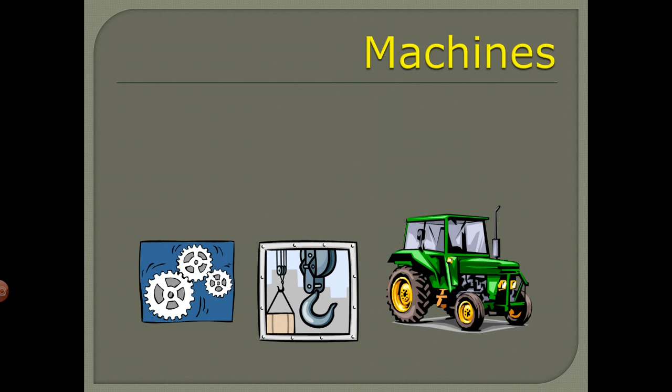This week we're talking about simple machines. What exactly makes a machine a simple machine? Well, a machine is any device that makes work easier.

We learned in the last chapter that work means using a force to move something a distance. A machine can change the size, the direction, or the distance over which a force acts. So that means a machine can allow you to use less force, move an object a greater distance, or change the direction of the force you're using, which in essence makes work much easier.

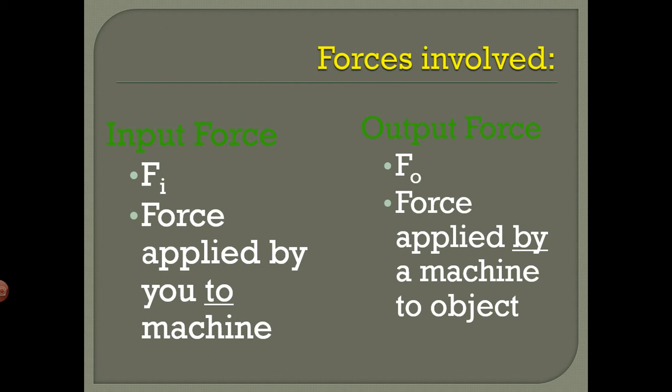There are two forces involved. The first force is called the input force. When we write this in an equation, we call it F for force, I for input, so Fi. This is the force applied by you to the machine. There's always two parts: you apply a force, and then the machine applies another force. The other type of force is called the output force, also known as Fo. This is the force applied by the machine to whatever object you're trying to move.

Since there are two forces, there are also two types of work being done. The first is input work. This is the work done to a machine, the work you would be doing if you were using a machine. It's equal to the input force times the distance through which that force acts. In other words, it's equal to how much force you apply times the distance you move in order to move the machine.

The other type of work is output work. Output work is the work done by a machine. That's equal to the output force times the distance through which the resistance moves, or the force that the machine applies times the distance the machine moves the object.

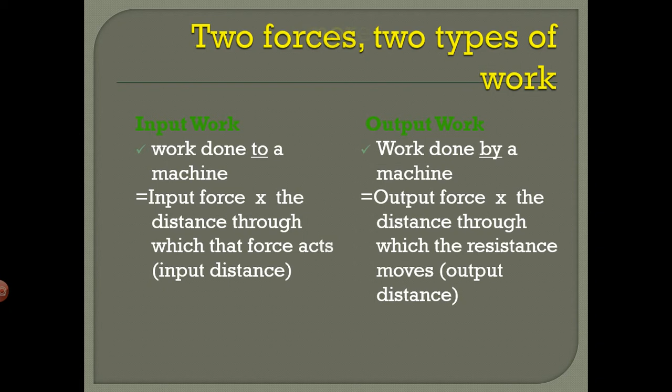What do you think? Can you get more work out than you put in? If you are using a machine and you put in a certain amount of force to move the machine a certain distance, and the machine transfers that work into the force it applies to the object and the distance it moves the object, can you ever do less work than the machine?

The answer is output work, or the work the machine does, can never be greater than input work. So even though machines make work easier, they're still not multiplying the amount of work you can do. You still have to do more work than the machine.

Why is this? Because some work is always needed to overcome the friction between the machine and the object it's moving, or the friction in the machine itself, or the friction between you and the machine.

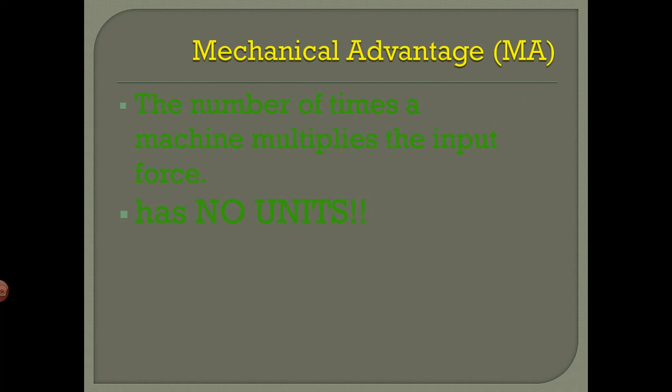There are ways to measure how good a machine is. That is called mechanical advantage. It means the number of times the machine multiplies your input force. So it means how much greater is the force of the machine compared to the force that you put in. This is kind of an ideal mathematical thing, so it doesn't have any units. The units end up canceling each other out.

The general equation is mechanical advantage equals output force, which is what the machine does, divided by input force, which is what you do.

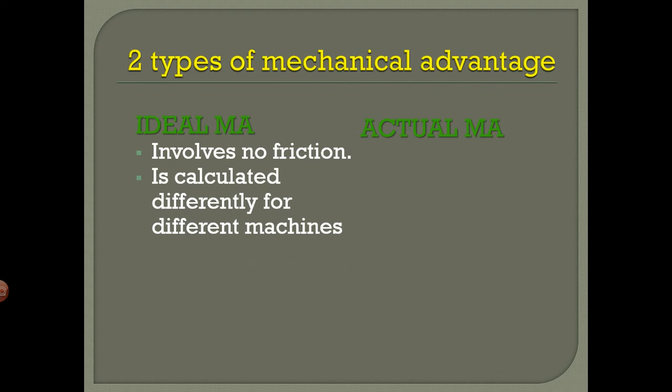There are two types of mechanical advantage: ideal mechanical advantage and actual mechanical advantage. Ideal mechanical advantage means that for this particular problem, we're going to pretend there's no friction—we're going to ignore friction. It's calculated differently for different machines, so if you use a wheel and axle, a lever, or a pulley, you calculate the mechanical advantage differently for each of those machines.

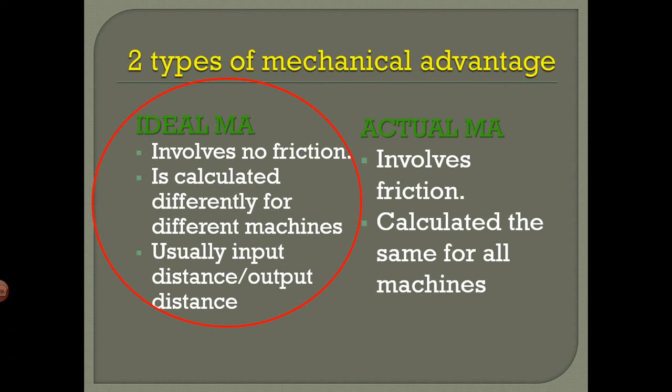Usually, though, it's some form of input distance divided by output distance. Actual mechanical advantage, however, does involve friction, and it's calculated the same for all machines no matter what. We're going to focus on ideal mechanical advantage because it's a little bit less complicated.

There are different mechanical advantages. You can have a mechanical advantage that's equal to 1, and that means the output force from the machine is equal to the input force from you.

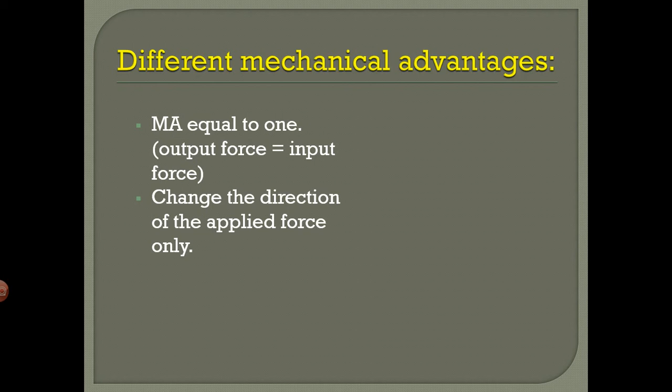This type of machine would change the direction of the force that you apply. It wouldn't change the distance or the amount of force. Think of something like a seesaw. The force on one side of the seesaw has to be the same as the force on the other side

of the seesaw to get it to go up and down, but the direction of the force gets changed. Then there's a mechanical advantage of less than 1. This is an increase in the distance an object's moved with the same force.

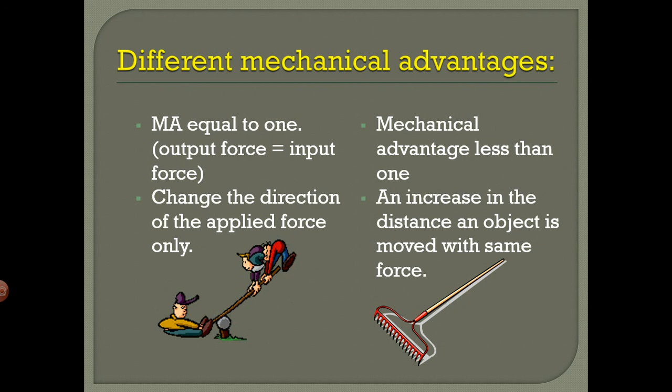Think of using a rake. You can pick up a bunch of leaves with the rake, or you can use the rake to pull the leaves or push the leaves somewhere, and you're going to use the same amount of force to move those leaves. However, the rake allows you to use that force over a longer distance, so it makes it a little more efficient.

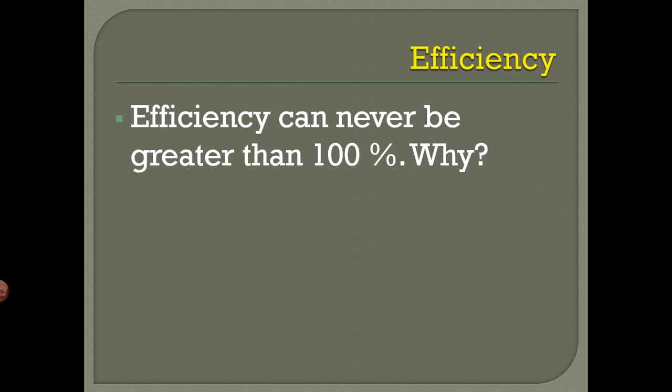Let's talk about efficiency. Efficiency can never be greater than 100%. Any idea why? It's because some work is always needed to overcome friction. Some work that either you or the machine does, or both, always has to overcome the friction that's in the system.

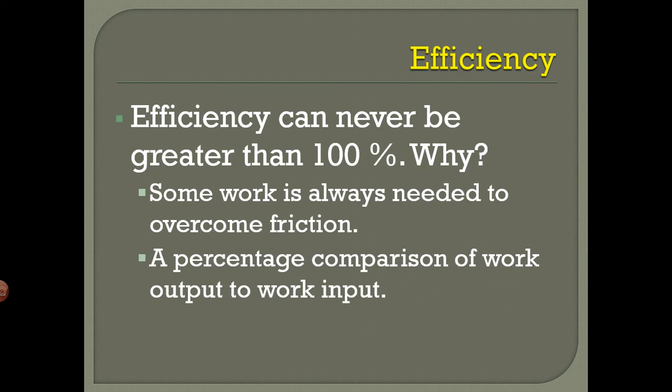Efficiency is a percentage comparison of output work to input work. And it's calculated as output work, or WO, divided by input work, or WI.

So we've talked about mechanical advantage, we've talked about the general definition of a machine. Now let's focus on the specific 6 simple machines and how you would calculate the mechanical advantage for each.

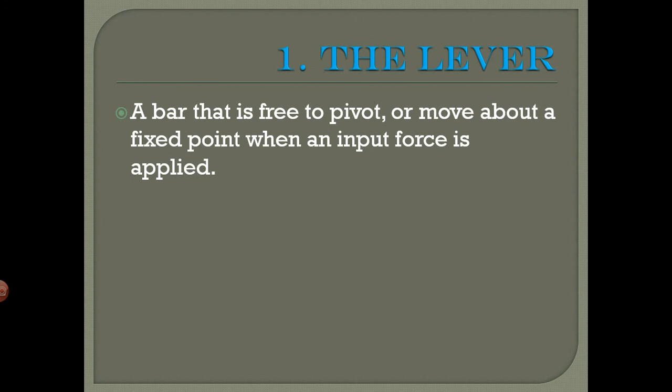First one we're going to talk about is the lever. This is a bar that's free to pivot or move about a fixed point when an input force is applied. That fixed point is called the fulcrum. This is the pivot point of the lever. It's kind of where the lever rocks or turns.

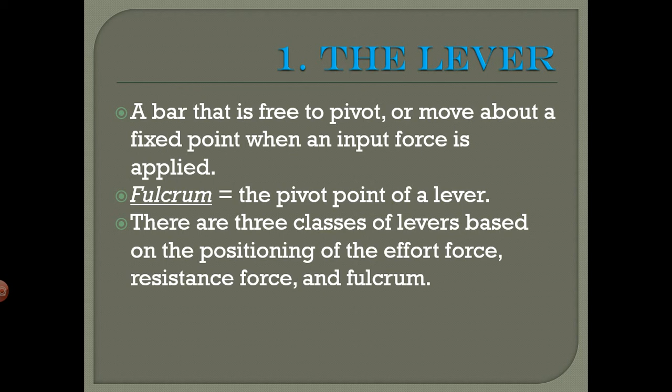There are 3 classes of levers based on the positioning of effort force, resistance force, and fulcrum, or input force, output force, and the fulcrum.

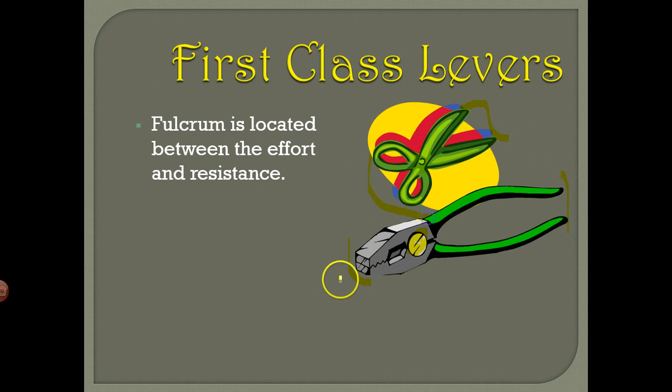First class levers have the fulcrum in the middle. They have the fulcrum located between the effort and the resistance. So some examples here - here's an example of where the fulcrum is on both of these, and the effort force and the resistance force would be on either side. So here and here compared to here and here. First class levers make work easier by multiplying the effort force and changing the direction of that force.

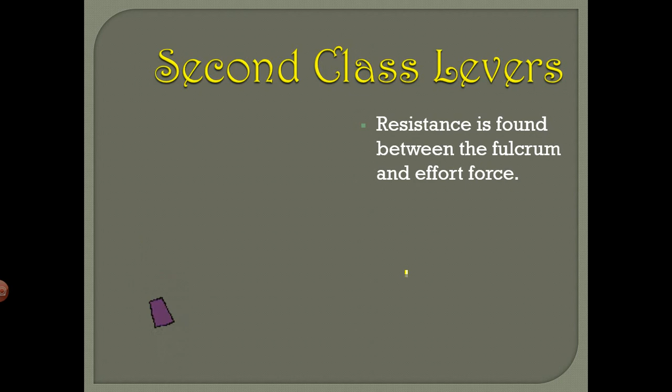Second class levers make work easier by multiplying the effort force, but not changing the direction.

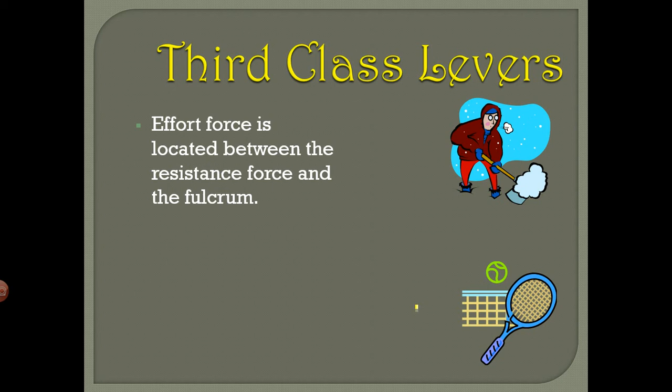Third class levers have the effort force between the resistance and the fulcrum. So these are the least efficient. They don't multiply the effort force, they only multiply the distance. So if you think of using a shovel, here's the work, here's the object you're trying to move. So this is where the resistance force or the output force would be. The fulcrum would be back here at this hand, and you have to pick up the shovel with this middle hand.

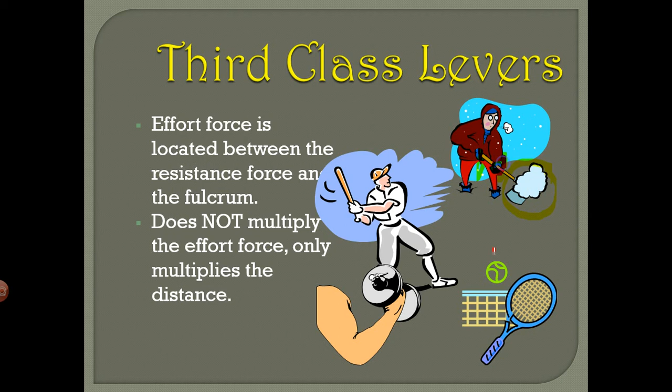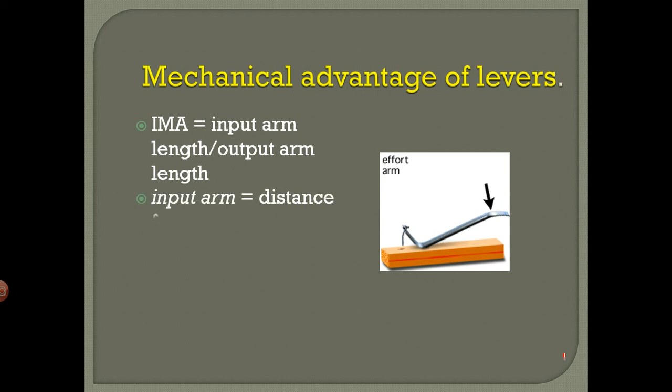For the mechanical advantage of levers, again we're calculating ideal mechanical advantage. You use the formula input arm length divided by output arm length. Let's talk about what those are. The input arm is the distance from the input force, which is where you apply a force, to the fulcrum. So it would be this length here.

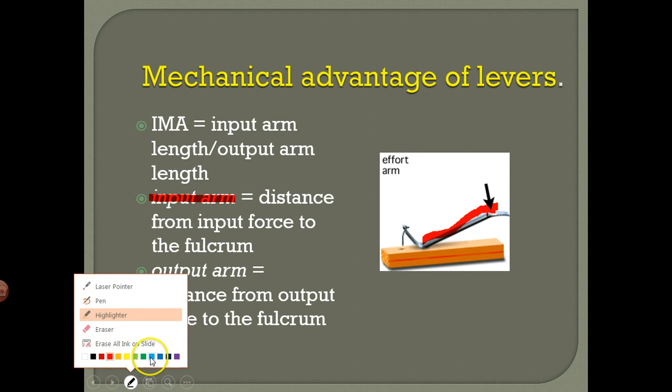The output arm is equal to the distance from the output force to the fulcrum. The output force is where the machine does its force, like on the nail, and the fulcrum is the pivot point, which is in the middle. The red section is the input arm and the blue section is the output arm. To find the mechanical advantage of that crowbar, you would do input arm divided by output arm.

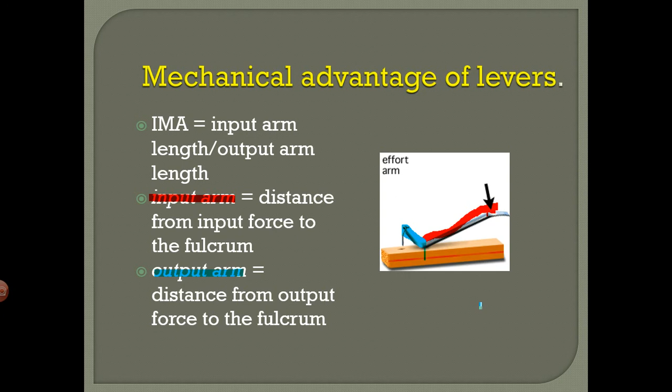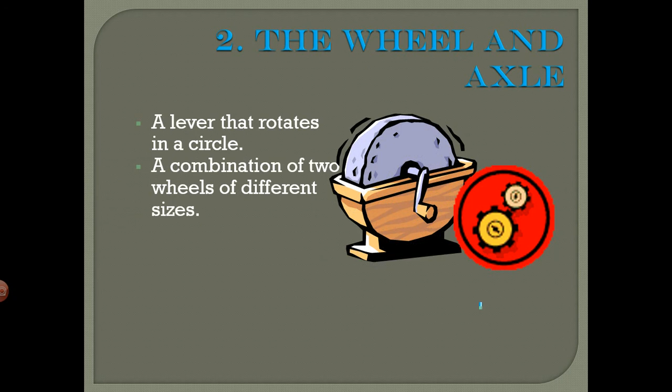Now let's talk about the wheel and axle. This is a lever that rotates in a circle. It's a combination of two different wheels of different sizes. The smaller wheel is termed the axle, and its mechanical advantage is calculated by the radius of the wheel divided by the radius of the axle.

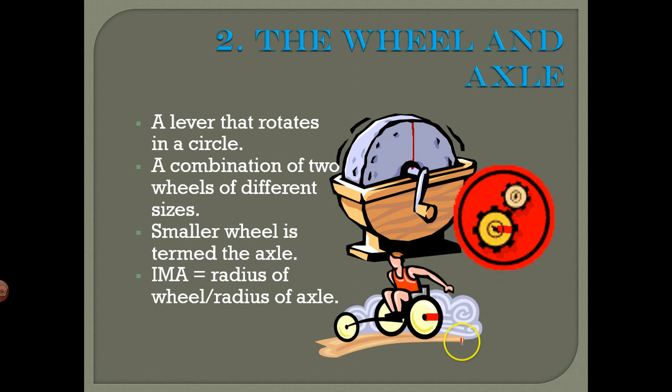Let's just go over, so you remember, the radius means from the center point to the outside edge. Here's the radius of this wheel, and here's the radius of this wheel. The axle would be that center point, so you would have to measure two radiuses.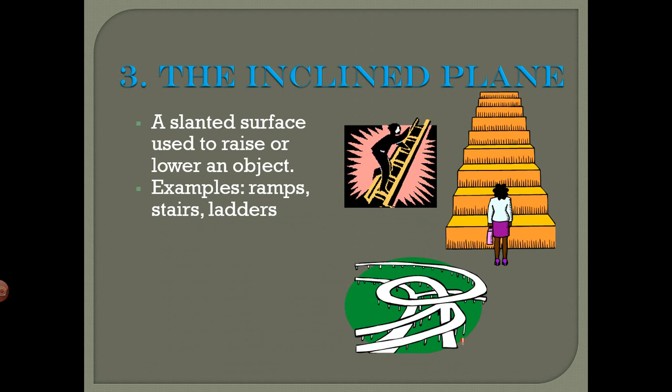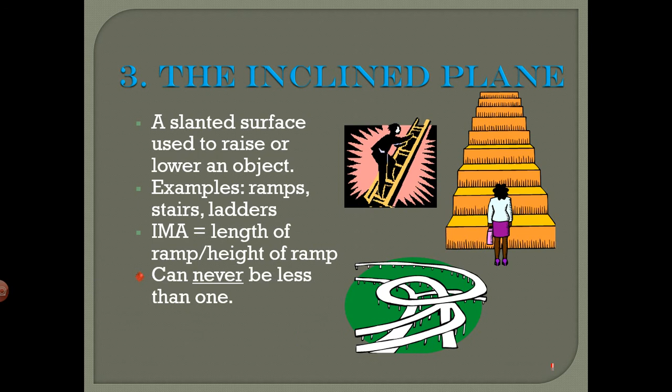Now how about the inclined plane? An inclined plane is a slanted surface that's used to raise or lower an object. For example, ramps, stairs, and ladders are all inclined planes. To calculate the mechanical advantage of an inclined plane, you take the length of the ramp divided by the height of the ramp. This is a fairly easy calculation. The mechanical advantage of an inclined plane can never be less than 1.

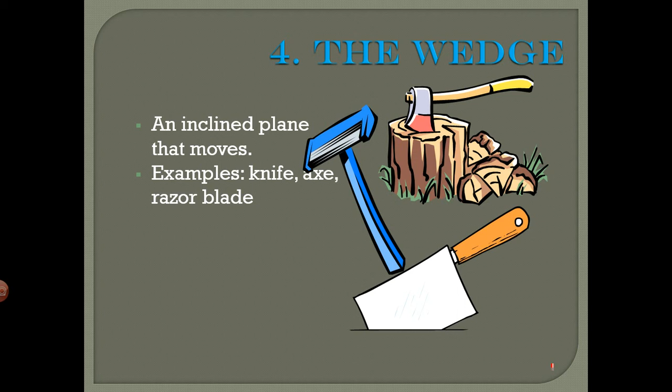Moving on to our fourth machine, we are talking about the wedge. Here are some examples. The wedge is like an inclined plane because it has that triangular shape, but it moves. For example, a knife, an axe, or a razor blade, these are all wedges. The mechanical advantage of the wedge is increased when you sharpen the wedge. When you make that sharp edge sharper, you increase its mechanical advantage. And you do not have to worry about calculating the mechanical advantage of a wedge.

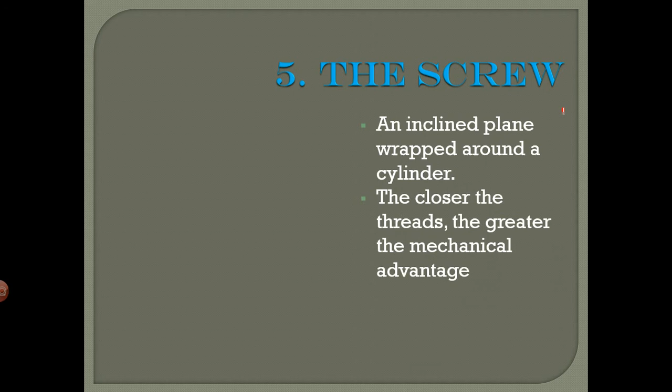The fifth machine is the screw. This is another inclined plane, but this time the inclined plane is wrapped around a cylinder. The closer the threads of the screw, the greater its mechanical advantage. Here's some examples of things you've seen. As you take the inclined plane and wrap it around, it forms this spiral shape. Even a spiral staircase is a screw.

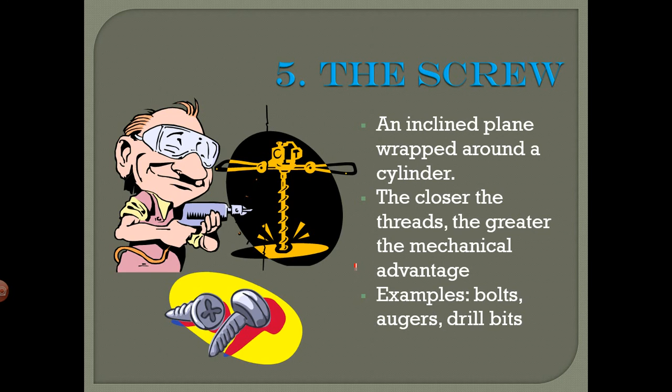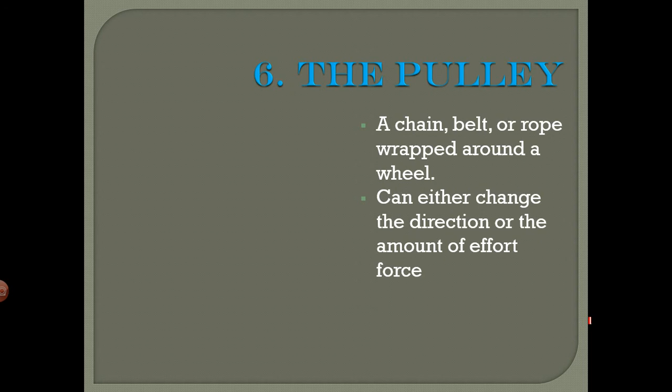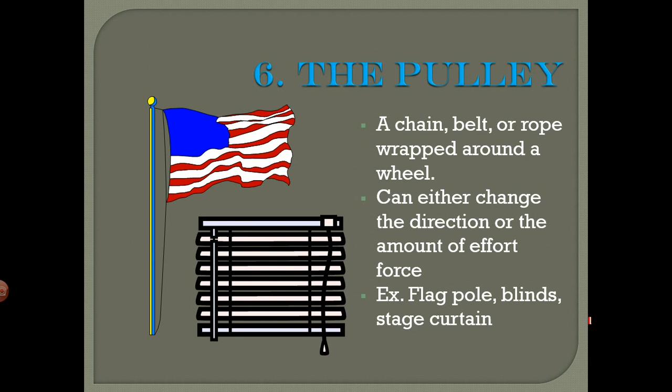And the final type of simple machine that we're discussing is the pulley. This is a chain, belt, or rope that's wrapped around a wheel. The pulley is great because it can either change the direction or the amount of force, and if you put more than one pulley together, it can change both. You find pulleys in places like on flags, to raise blinds at a window, or for a stage curtain.

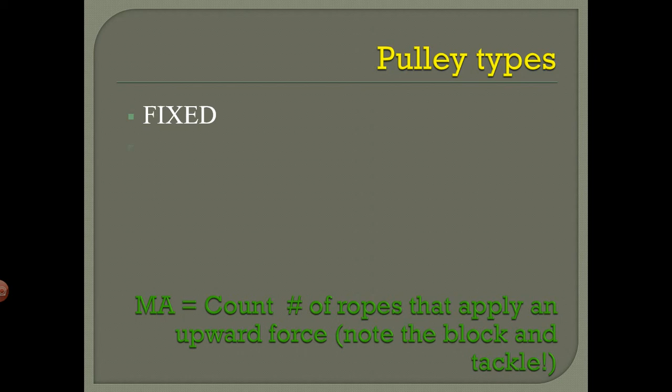There's more than one type of pulley, just like there's more than one type of lever. The mechanical advantage of the pulley equals the number of ropes that apply an upward force. There's a fixed pulley. The fixed pulley can only change the direction of a force, and that will have a mechanical advantage of 1.

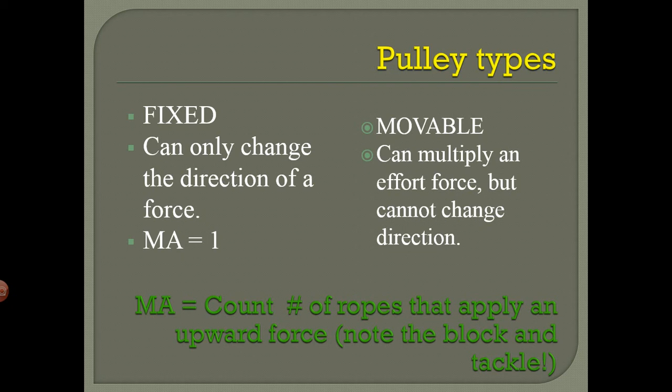And then there's a movable pulley. A movable pulley can multiply an effort force, meaning your force, but can't change the direction. So that means if you're using a movable pulley, the pulley is attached to the object you're moving, and if you pull up, the object would also go up. Or if you pull down, the object would also go down. This type of pulley has a mechanical advantage of greater than 1.

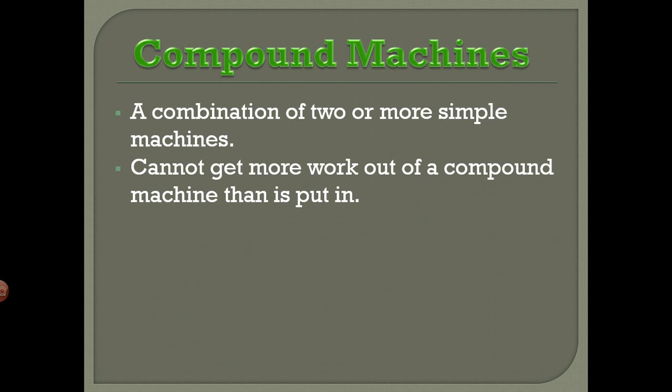Now, if you take more than one simple machine and put them together, you actually get a compound machine. Sometimes things we think of as simple machines are actually compound machines. You still cannot get more work out of a compound machine than you put in. Examples include a mixer or a crane, or even a pencil sharpener, which seems fairly simple, but a pencil sharpener includes a wheel and axle, a lever, and a wedge on the inside.